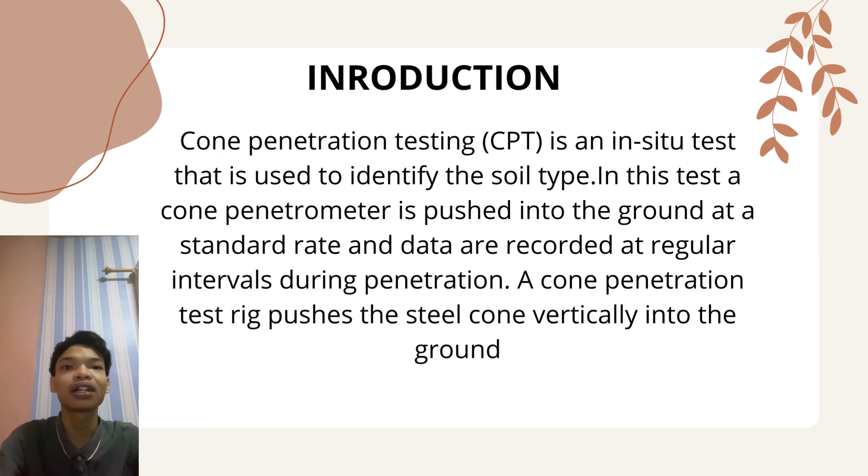I want to present the introduction. Cone penetration testing is an in situ test that is used to identify the soil type. In this test, a cone penetrometer is pushed into the ground at a standard rate and data are recorded at regular intervals during penetration. A cone penetration test rig pushes the steel cone vertically into the ground.

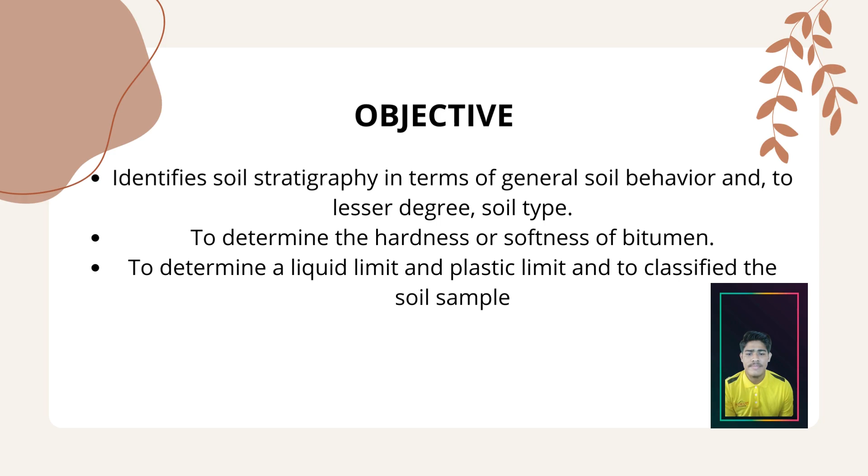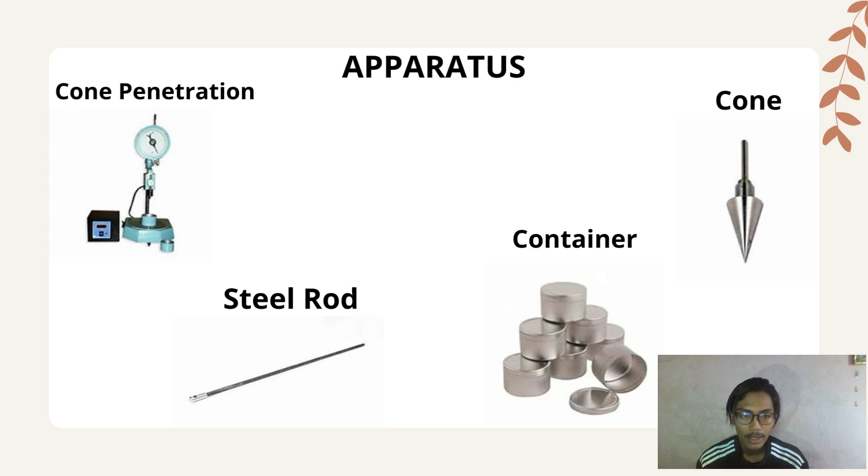Okay, for the apparatus for this project, we use the cone penetrometer, steel rod, container, and steel cone. For the procedure, first, sieve 300 grams of dry soil through the 425 µm test sieve. Second, place about 300 grams of dry soil passed through the 425 µm test sieve into an evaporating dish.

Third, add distilled water and mix the soil with the spatula for at least 10 minutes. Next, place a portion of the soil paste in the cup and press the soil paste against the side of the cup. Avoid trapping air. Make sure the top surface is smoothed off level with the rim using the straightedge.

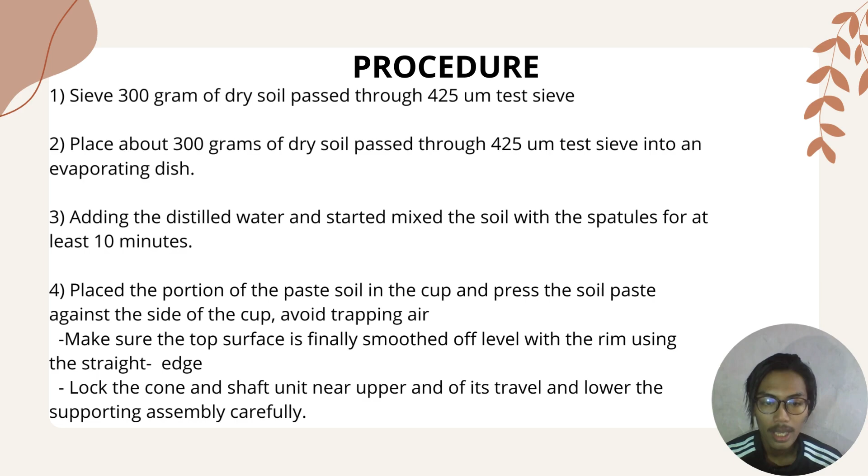Lock the cone and shaft unit near the upper end of travel and lower the supporting assembly carefully. Next, lower the stem of the dial gauge to make contact with the top of the cone shaft. Make sure the tip of the cone is within a few millimeters of the surface of the soil in the cup. Press the button to allow the cone to fall and wait for 5 seconds.

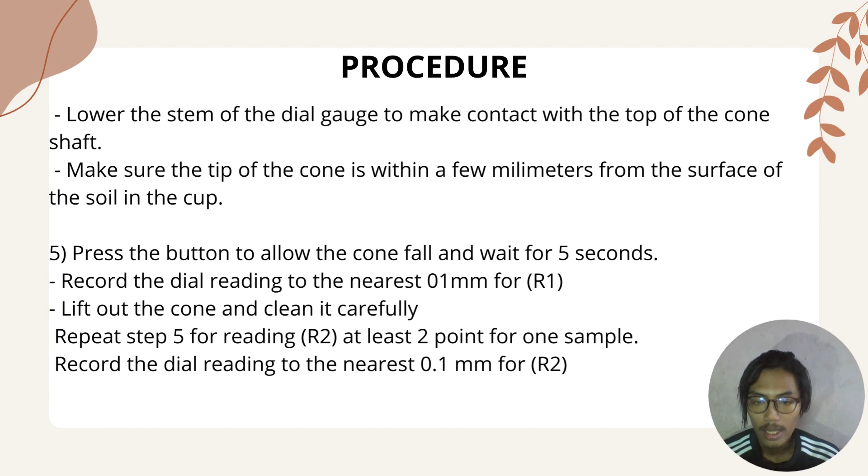Record the dial reading to the nearest 0.1 mm for R1. Lift out the cone and clean it carefully. Repeat step 5 for reading R2, at least 2 points for one sample. Record the dial reading to the nearest 0.1 mm for R2.

Okay, step 6. Take a moisture sample of about 10 grams from the area penetrated by the cone in the moisture can. Step 7. Weigh the empty container and moisture container. Remove the rest of the soil paste from the cup to the evaporating dish. Add more water to the soil paste in the evaporating dish and mix thoroughly.

Repeat steps 4 to 7 for tests 2, 3 and 4. Take a moisture sample for every sample, test 1, 2, 3 and 4. Put them into the oven and let them dry for 24 hours. Weigh the moisture content after 24 hours.

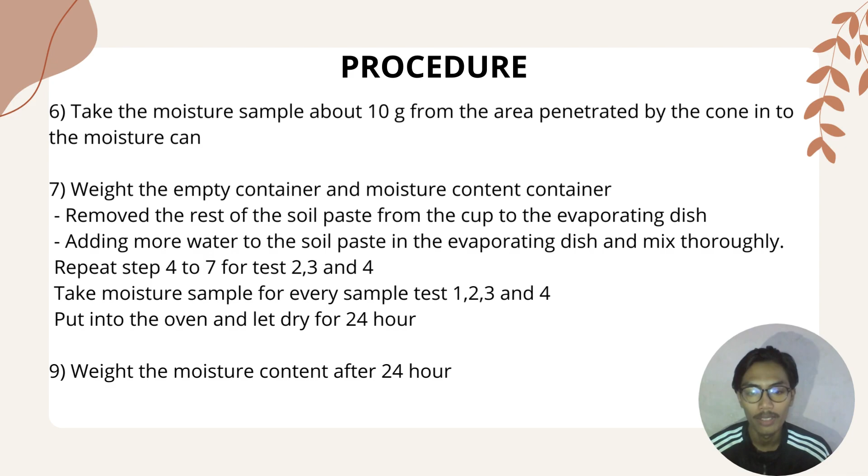Okay, next, data analysis, so everyone can see. For the first analysis, the sample numbers are sample 1, sample 2 and sample 3. And lastly, the plastic limit is 23.59%.

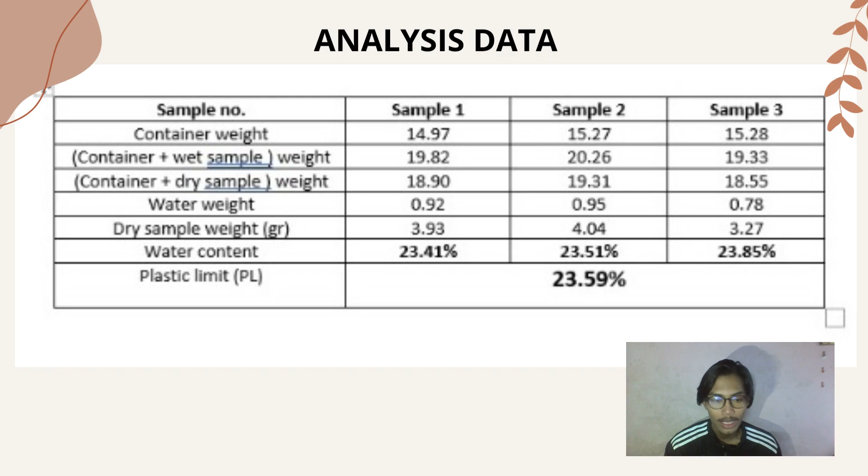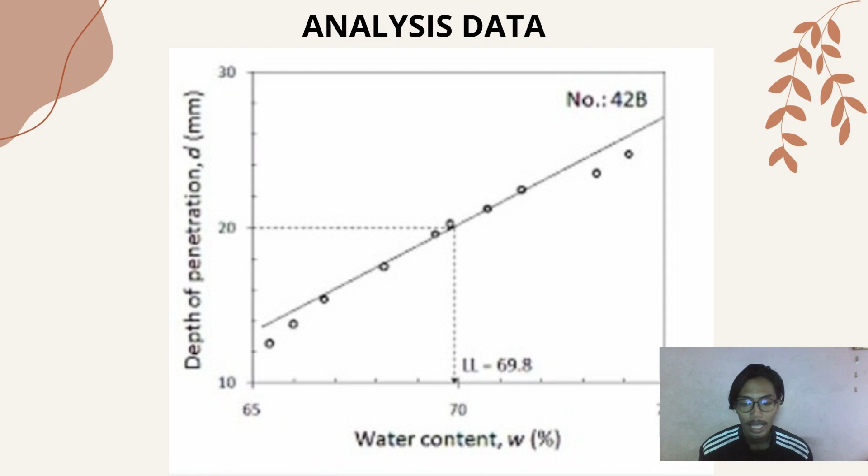Okay, next, data analysis for the graph. This is our graph. We plot water content on the X axis and depth of penetration on the Y axis. And then we made a line, as everyone can see in the graph.

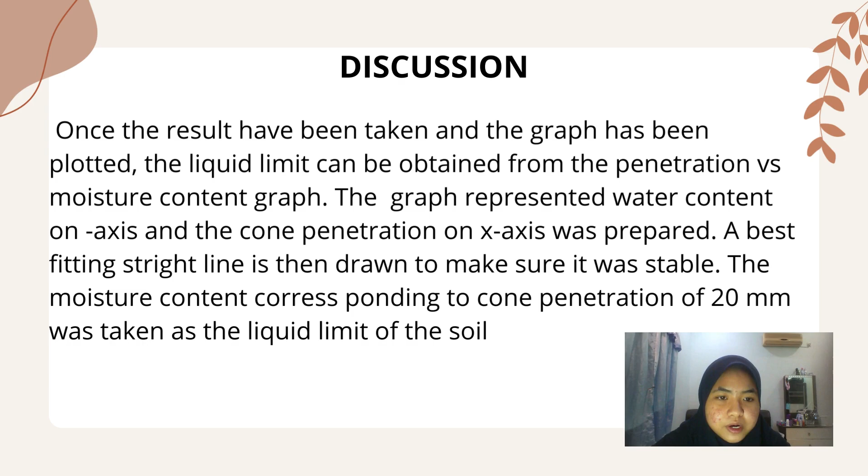Discussion. Once the results have been taken and the graph has been plotted, the liquid limit can be obtained from the penetration versus moisture content graph, with water content on the Y axis and cone penetration on the X axis. A best fitting straight line is drawn, and the moisture content corresponding to a cone penetration of 20 mm was taken as the liquid limit of the soil.

In conclusion, based on the cone penetration test, we successfully obtained the liquid limit. In order to get an accurate result of the depth of penetration when using the penetrometer, we must make sure the tip of the cone just touches the surface of the soil sample, and not even slightly away from the surface of the soil sample, because it will affect the reading of the penetration.